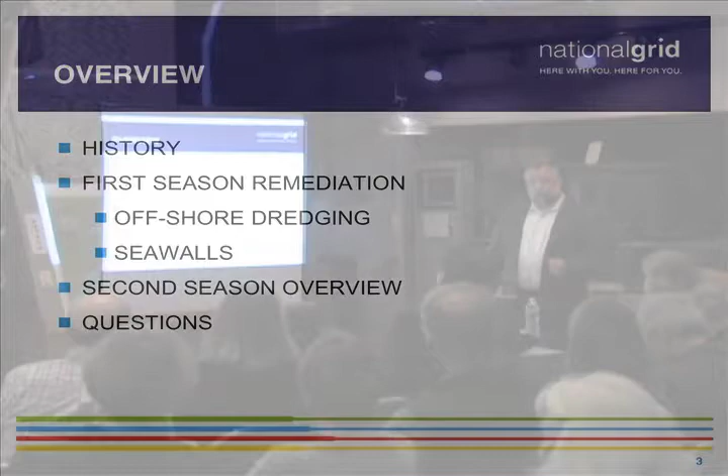So what we're going to be talking about is a brief overview of what we're doing here. First, a little history, and then we're going to get right into some of the major elements that we did this particular season, and then do a brief overview of the second season of work. This is a two-season project. We started in September of 2015, and it's going to end here in May, and then pick back up again in July, and hopefully be done in May of 2017.

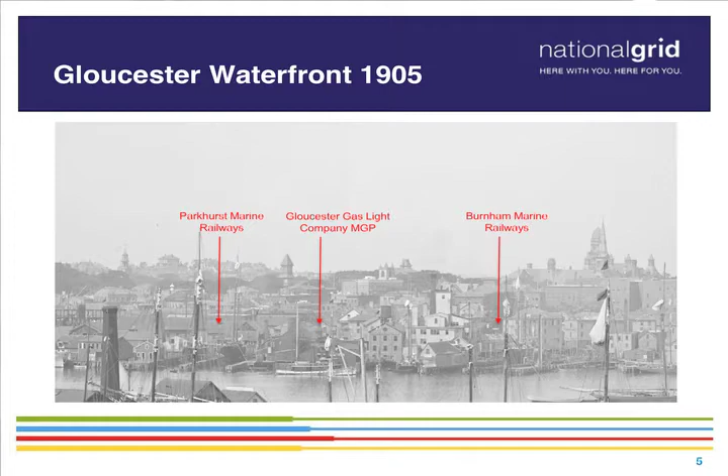So historically, the waterfront was much more crowded. It actually has an industrial past in this area. We had marine railways on either side. Of course, the existing railway here at Maritime Gloucester is still here. And then the MGP, a manufactured gas plant that produced gas for the city from the 1850s or so to about the 1950s, was located at what's currently Solomon Jacobs Park and on the National Grid property. This is a legacy company of National Grid. Through various mergers over the years, it became part of our responsibility.

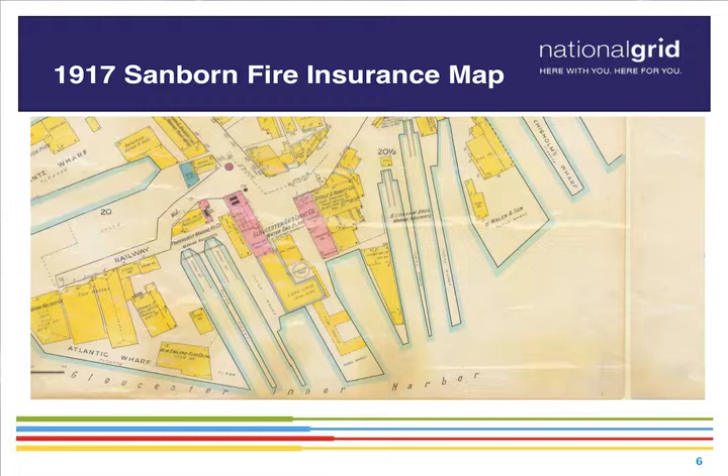So we've been working out here for a long period of time, as Tom indicated, about 11 years. Originally we were doing the investigation phase. We spent a long time. It was a very extensive investigation. During that investigation we did hundreds of sampling locations, both in the upland and in the water. Hundreds of samples were collected and analyzed to come up with this plan that we're implementing right now.

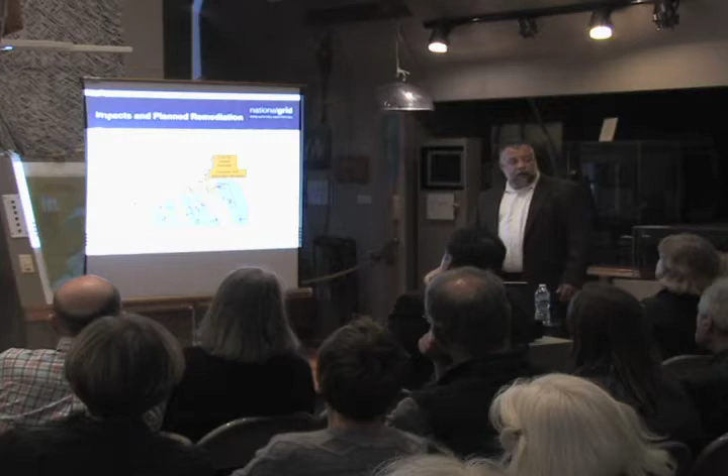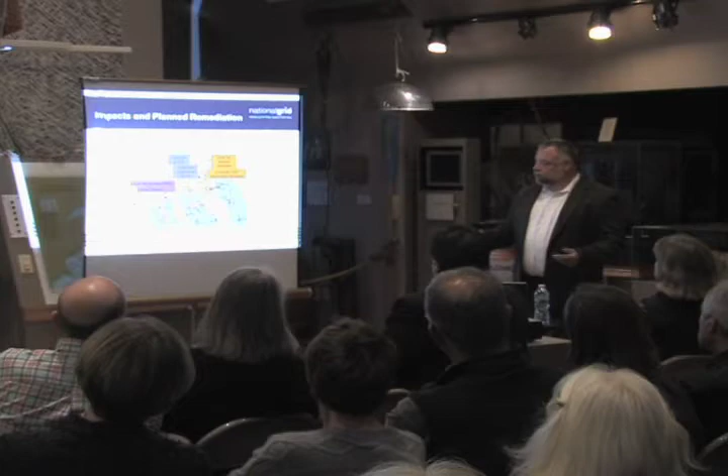That plan consisted of removing soil behind the existing seawalls on the park and on National Grid's property, removing soil from out of the park and then putting in a multi-layer cap. We have coal tar, a byproduct of the manufacturing process. Basically when the coal was superheated to drive off the gas, one of the byproducts of the residuals is coal tar. Coal tar was a product that they tried to sell. They used it in roofing and asphalt, roadways, and in certain commercial products. Up until recently, it was a component of Denorex, used for treatment of psoriasis.

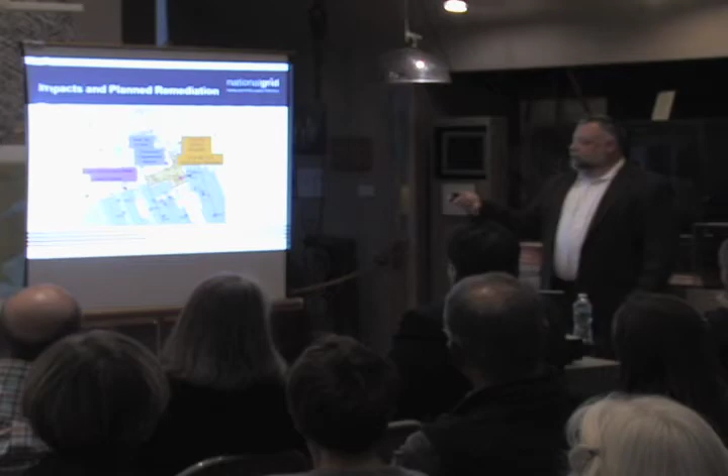But we have coal tar at depth here, about 60 feet down or so, where the interface of the till and the bedrock is located. So we're going to be putting in monitoring wells and recovery wells as part of this remediation, and that product will be removed over the next few years after we get this system in place. And of course, we are removing sediments that have been impacted by the coal tar.

Approximately 7 acres is within the dredge area. And then after we're finishing dredging, we're going to be putting in a subaqueous cap over the sediments to make sure that there's no further migration of compounds into the waterway.

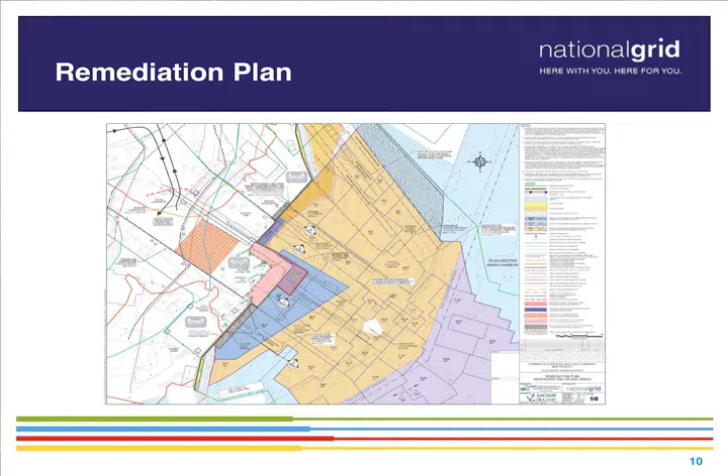So the two primary things I want to talk about tonight is the offshore dredging, which was actually completed this year, primarily completed, which is the offshore being anything past the harbor line into the navigational channel. So dredging, I'm sure you'll see it. I think it's actually still out in the harbor. So this is the dredging equipment that was used. The dredging work was actually performed from a subcontractor to Charter, Riverside and Pickering, out of New Hampshire.

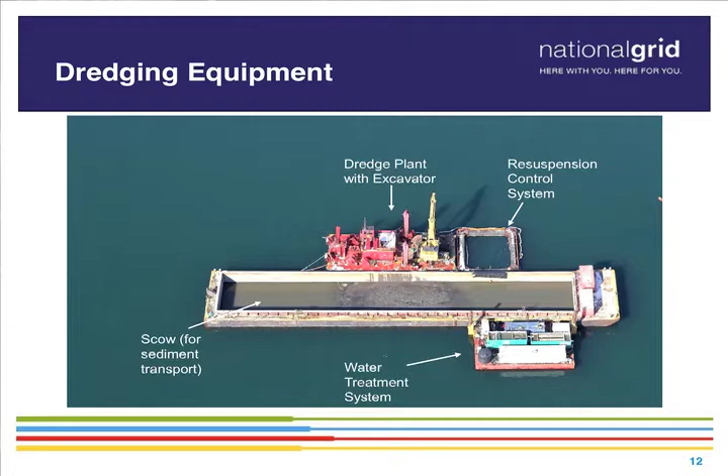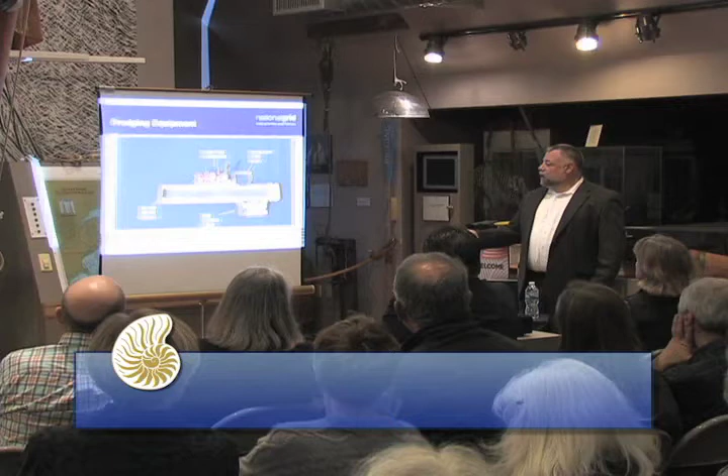And so the various components that make up this platform. So we have the dredge plant. Basically, it's a barge with a control house, an excavator, in this case, it could be used as a crane. And then we have a resuspension control system here. This is basically a turbidity curtain that surrounds the area where the dredging is occurring to keep any sediment that is suspended into the water controlled into that one little area. And then the scow, where the sediment is deposited for then transport off-site, and our water treatment system. So I'll talk about each individual piece.

So the turbidity control system. So this is a rigid frame. So it's a turbidity curtain around the edges. It actually goes all the way down to the bottom, or just slightly off the bottom. You don't want to actually touch on the bottom because it actually disturbs the sediment even more. So it's a little bit raised off the bottom. And then we have a 9-foot tidal swing here in the harbor.

So as the tide comes in and out, this is actually raised and lowered by these reefing lines so that it always is so many feet off the bottom to make sure we control the turbidity that is occurring during the dredging operation. And of course, with the tidal swing back and forth, there's a lot of velocity, tidal currents. So it actually is anchored to make sure it doesn't get blown into where the dredge bucket is actually going down through the water column.

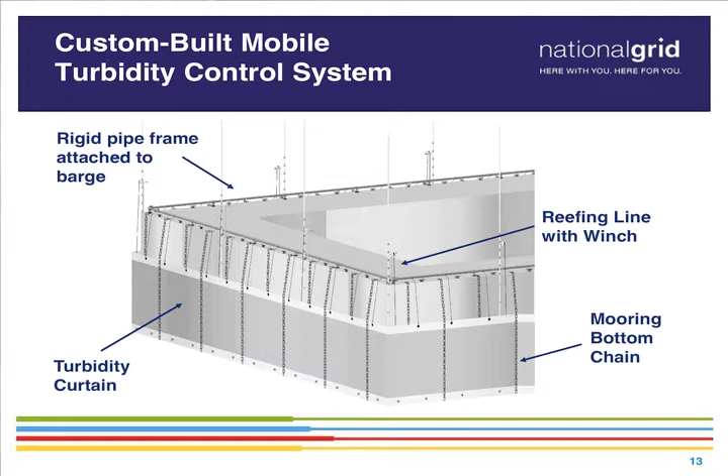So this was actually manufactured on site. It was put together here, specifically designed for this project. This is a view of it before it was actually deployed. And then it being deployed into the water. So there's a walkway here to allow the laborers to come around and move along and move those winching reefing lines as necessary.

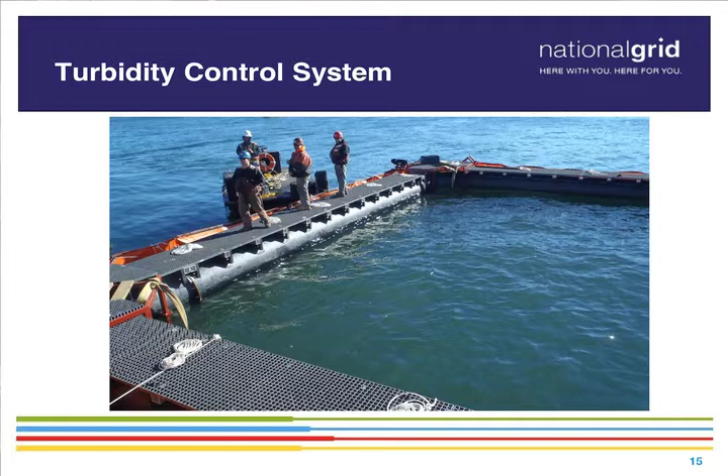So the dredge plant is a large excavator. We're looking at about, I think, 28 feet of water depth here. So this boom is actually capable of reaching to 35 feet with the bucket on it. We have a 1 to 3 foot dredge cut in the harbor. We're moving about 1 to 3 feet in each one of those units of sediment that was being removed. So this was actually capable of making sure that we reached all of our dredge depths.

And this is the control house, as I indicated. Inside is a unit that basically controls the operation of the barge itself. And then the barge itself is anchored with spuds. These things, metal tubes, are actually lowered into the sediment to hold the plant in place so that we can focus on one specific area at a time. And this back spud is actually a walking spud. So this is actually capable of moving slightly side to side, so that if we have to make adjustments, they can do so without actually moving the whole system.

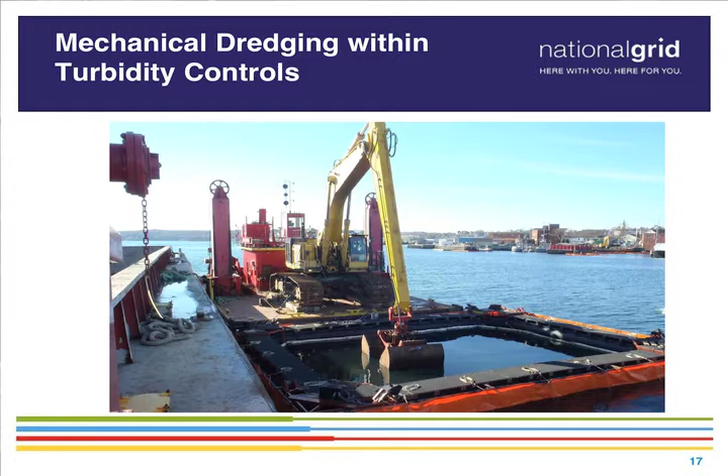So this is a shot of actually the dredge in place, everything in place. So this bucket is an environmental bucket, and I'll get to it in a second. It's a little bit different than your standard mechanical dredging operation. So we have a sensor actually on the bucket, and this cord is actually going back into the cab of the operator. So they have controls in the cab to allow them to position the bucket wherever they need to.

So the environmental bucket is a specially designed bucket for environmental work. It's designed to make sure that the sediment is kept within the bucket. It does allow some of the water that actually is generated when we take a scoop to come out, which is why we have this splash pad here. So the splash pad is, as the bucket is coming out of the water and moved over into the scow to dump this load, there is some little spillage of water. So the water is then sent back into the dredge area or into the scow.

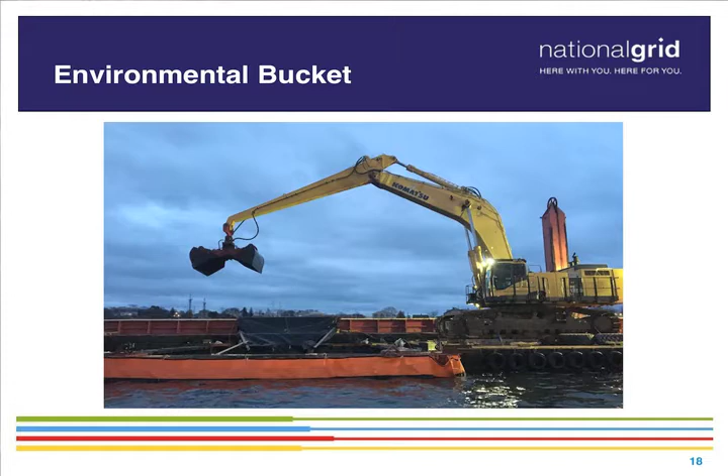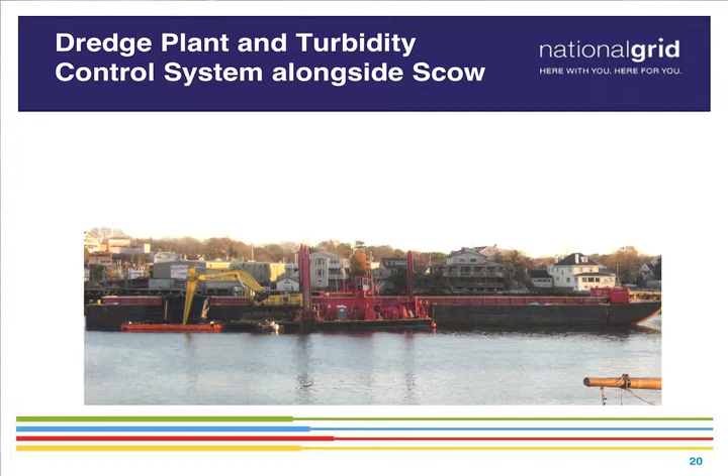So again, a picture of the entire system. I don't know if you've seen the plants still out here, but this whole system is roughly the size of a football field. So this is about a 250-foot long scow, and with the dredge plant here, the scow, and the water treatment on the other side, it's about 150 feet wide.

The scow itself can hold about 2,200 to 2,500 cubic yards of material, which is about a week's worth of production that we were doing. So approximately every week, we would load up a scow and have another one come in.

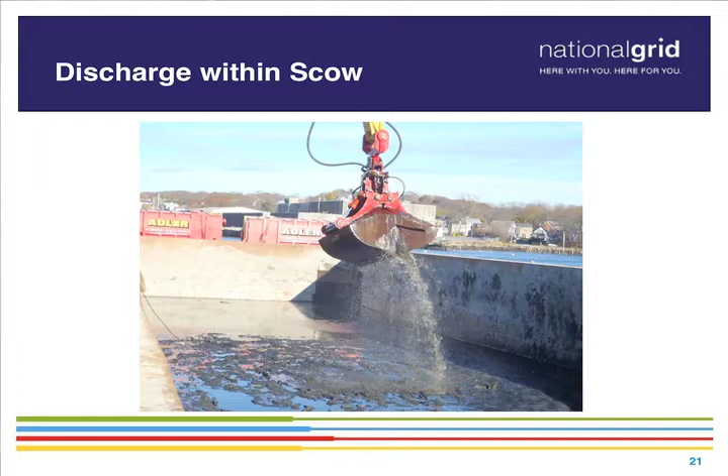Once the material is placed in the scow, we then pump off the water into our treatment system. So this treatment system was actually created specifically for this project. It was put together off-site and then floated here. But it's actually a modular system. So these floats are called flexi floats. It's almost like a Lego system. They snap them together so that you can make these as big as you need to in order to accommodate the size of the treatment system that you want to put on it.

And the treatment system itself is multi-component. So we have product recovery. So if we generate any product during the operation, it then gets collected. It then goes through various treatment, including removal of solids, and then a filtration step. It then goes through carbon for adsorption of any organic compounds in the water, and then it also goes through a metal treatment step before eventually being discharged back into the harbor.

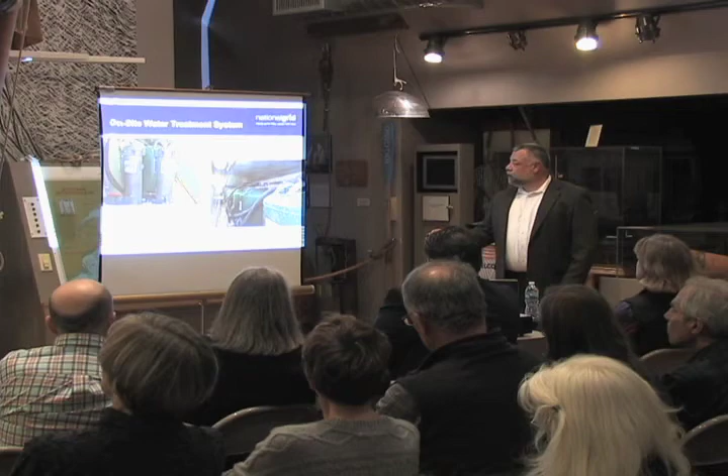So this is a picture of inside one of the trailer units that's on the floats. These are what are called bag filters. They're actually our particulate removal system. And then these are canisters holding the carbon and the metal treatment.

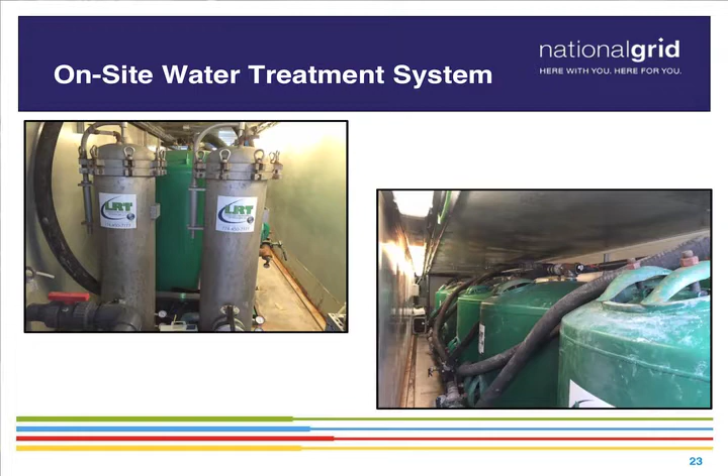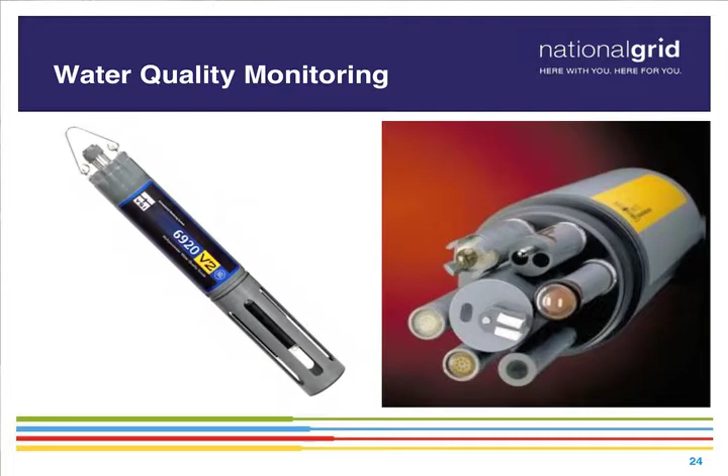So during the operation, we're also required to monitor the water to make sure that we're doing things in accordance with our permits, and also to make sure that we're not causing additional problems. So we use water monitoring equipment, measuring primarily turbidity, and we did not have any exceedances of our permit during the offshore dredging operation.

It actually is an alternative approach that the contractor came up with during the bidding process, and is one of the reasons why Charter, not to mention they're a great contractor, won the job. So originally we were supposed to send the material to our substation, which is on 109 Rogers Street,

with very limited space there, which also limited the amount of production that we were looking to do. So by doing this alternative, we were able to speed up the process. It was a little bit more costly to send it to New Jersey, but overall it was more cost effective, and also it lessened the impacts to the community.

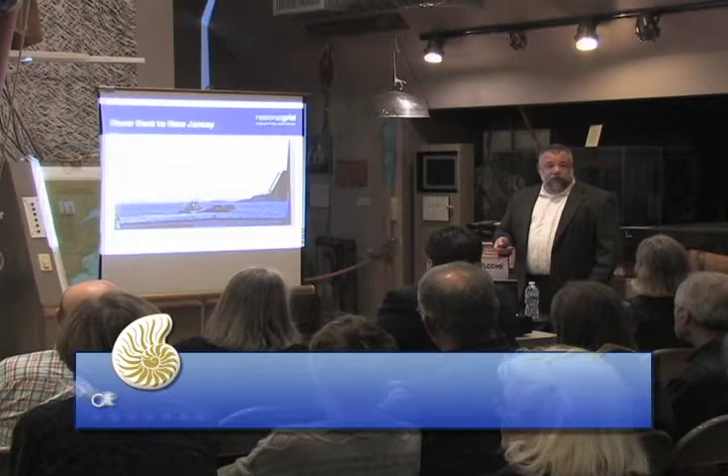So once it goes to New Jersey, the sediment is processed. We remove the water. It then gets sent to a thermal treatment facility where the organics are removed by heat, basically burnt off. And then finally it goes to another landfill in Pennsylvania to be used as daily cover. Daily cover: every day they cover the trash in the landfill.

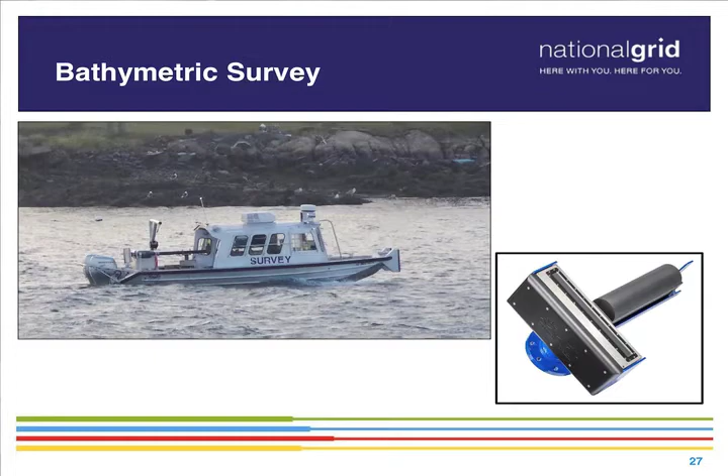So the question then is, how do you know you got everything, right? So on a regular basis, we're doing our survey of the bottom. We actually have a survey boat on site. It's a hydrographic survey. Basically, we have a sensor on the bottom. This is taking a picture of the bottom. That tells you if we met our design depths and makes sure that we removed everything that needed to be done.

We've finished the offshore dredging portion of this project. Using the survey, we identified a couple of isolated high spots that still need to be removed, but we were past our window of opportunity to do that work per our permits. We have a restriction not to do any silt-producing work after February 15th. So those high spots will be addressed next season. So that's the offshore dredging.

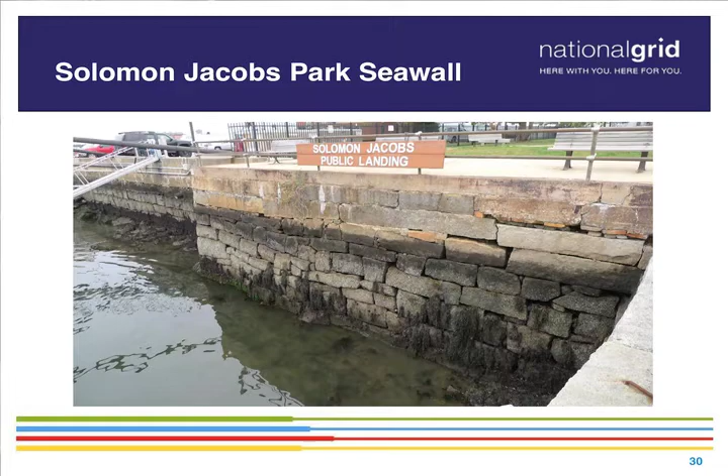I'll talk a little bit about the park seawall work. So this is the Solomon Jacobs Park wall. As I said, this is a historical seawall. It actually dates back to the plant itself, circa 1890 or so. So it's greater than 100 years old and was ending its useful life. As you can see here, there's a slight bow in the wall. This is actually a failure. The soil is starting to move, and these stones are sliding out to the harbor.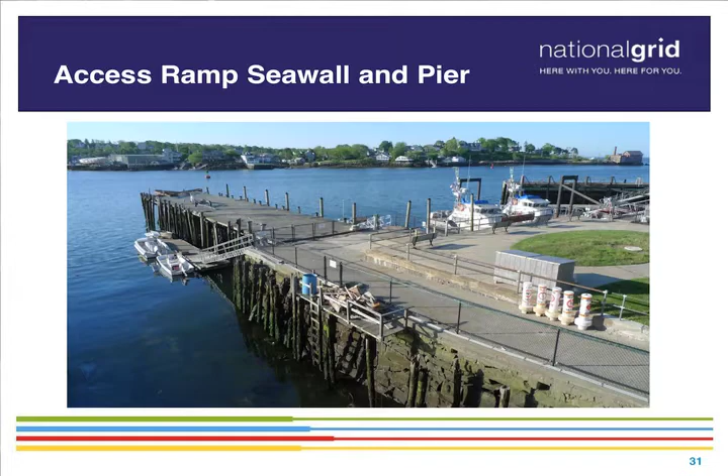And on the National Grid side, it was even a little bit more pronounced. We actually had some sediment issues in the platform. If anyone walked out here, you probably saw some patches over here. It's actually soil being lost through the seawall. But this seawall is historic in nature. It required additional permits. We are working with marine archaeologists and other professionals to make sure that we're putting back the new seawall in similar aesthetics as the original wall.

So at the end of the day, hopefully we'll have an improved seawall that will last another 100 years. And also with the improvements of the seawall itself, we have removed National Grid's pier, which was in a state of disrepair itself and needed to be replaced. The city is going to be taking over our property as a lease and installing a new floating dock system. So hopefully we'll have a very improved, more functioning waterfront when we're done.

So how do we do this, right? We need to remove this soil. It's about 2,000 cubic yards of soil behind the wall. It's not like we can just go in and remove it. We have buildings behind it. We've got the Coast Guard operations over here. So the first step is making sure that this material stays in place. We did that with a support of excavation wall.

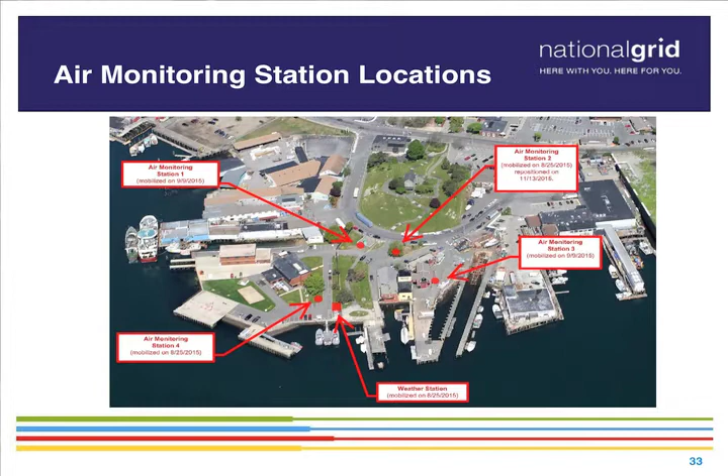One being air monitoring. So we have air monitoring stations, and if you've been around the Maritime Gloucester property, there's actually one right beneath us, I believe over in this corner. And we have a couple out near the park, and then one on the Coast Guard. So these are monitoring the air 24/7, 7 days a week, 365 days a year. They're online at all times. They consist of multiple detectors. They are used to test for dust, and then also for organics in the air.

So this is actually fed back to a computer on the site, and then if we're off-site at the time, we are actually linked in through mobile phone, so if there's any kind of alerts from the system, the off-site project people can actually get the alert and then relay to the people back at the site, or come to the site to see what's going on.

We are also monitoring stability. So we're making sure that the actual infrastructure that stays in place, this is the U.S. Coast Guard seawall, doesn't move during our work. So these are actually sensors that, again, are fed back to a computer, and these monitor if there's any minute movement in the seawall itself. So we know well before if there's an issue of this thing having some kind of stability problem.

And of course, during the work, we want to make sure that we contain any suspended solids. So we actually have another turbidity curtain around the work area. It's a very similar situation as with the marine dredging, and very similar concept, except that it's a long linear length of boom that surrounds the entire work area instead of a very isolated area.

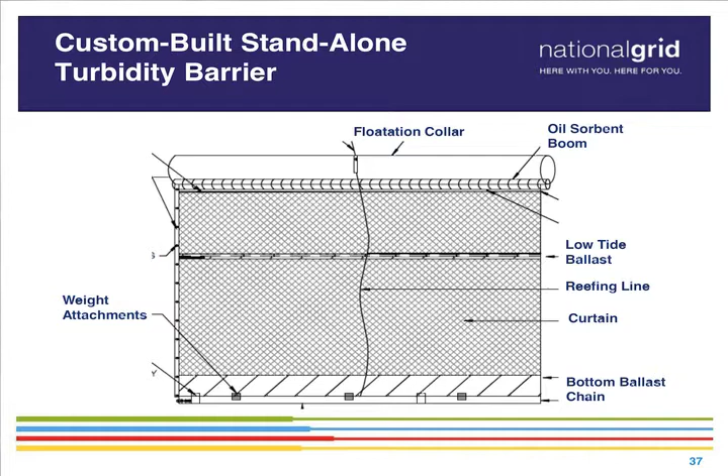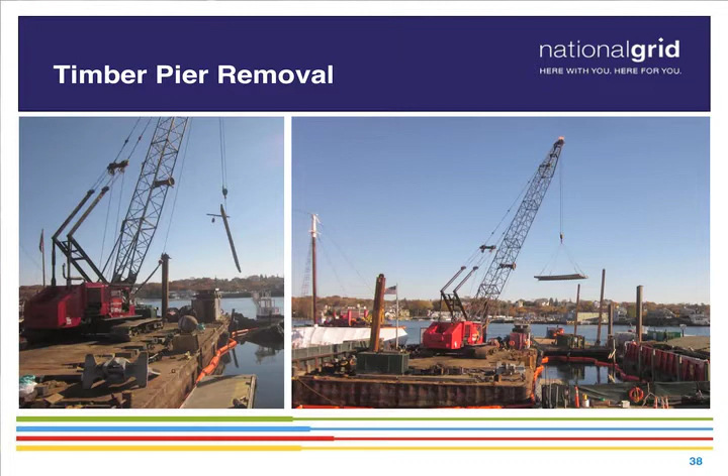So the first step, as I said, was the removal of the timber pier. With a barge-mounted crane, we're able to cut the pier up into sections and place it into a container for delivery to another location off-site. Now we have very limited space here at the site. You see it's a very congested site, a lot of equipment, and so we weren't able to move this material onto this land and ship it off this way. So this material was actually shipped to Quincy to a contractor yard, where it was then picked up out of the water and put onto trucks, and then it was shipped off to another landfill.

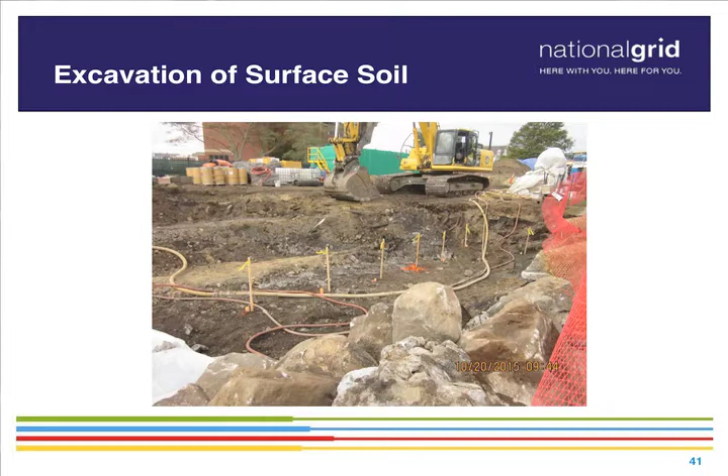So the first step is actually getting our equipment down to the proper elevation. So this is the removal of the surface soils, so we can get our drill rig in to drill the piles. This is actually a layout of where the piles will go. You can see the spacing here, very tight spacing. And then the actual drill rig itself, putting the piles in.

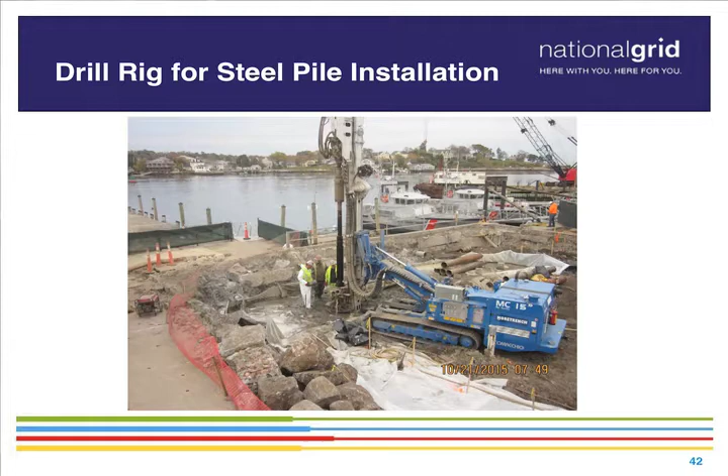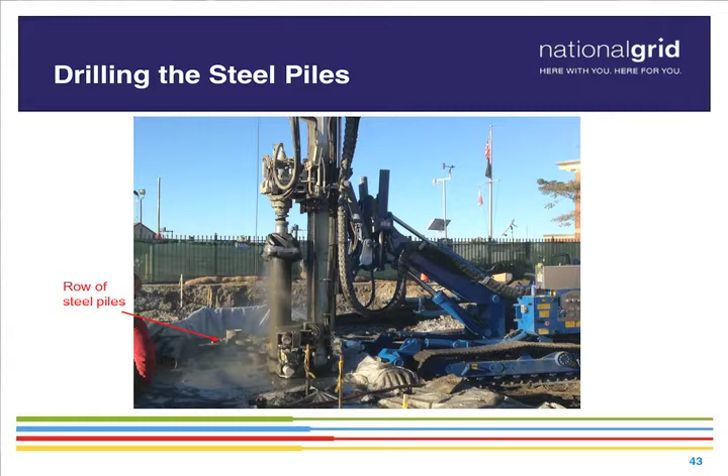The park elevation was roughly around 10. So we removed a few feet of soil in order to get the drill rig in here. And you can see we've already made some advancement here with the row of piles in place, working on the progress. And then this is the row in place as we start to remove some of the soil in front of it.

So obviously we're working with the tides. We know that there were difficult subsurface conditions here. Through all our investigative work, we've actually encountered sizable boulders. I believe the largest that we encountered was about 14 feet in diameter. To give you an idea, it's somewhere very close to this, from the floor almost up to the ceiling in size. So it's large boulders underneath us.

So we didn't encounter the 14-footers, but we did encounter a few sizable pieces that had to be broken up. So we know that we had a lot of work to do within the time allotted to us. Obviously, we had to stop. We had to get the foundation of the new wall in place prior to February 15th, the same window of opportunity that we had with the dredging.

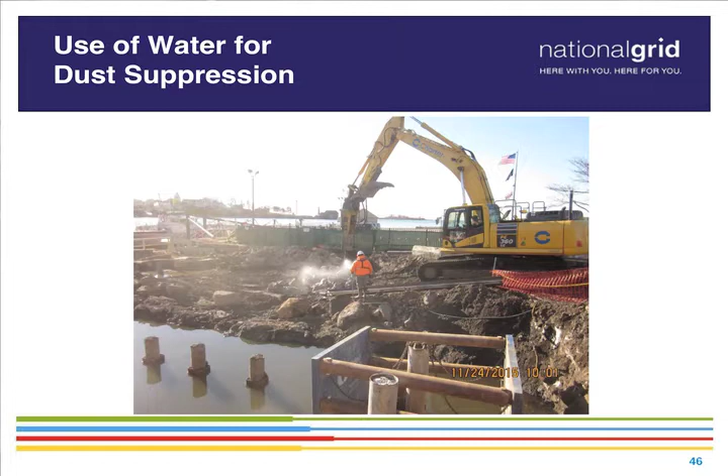where this material was going. So as part of that, we make sure we control our dust being generated as we bust this up. This is a hydraulic hammer, breaking up rocks into about 6-inch or smaller sized pieces. And we use water to suppress the dust during the work.

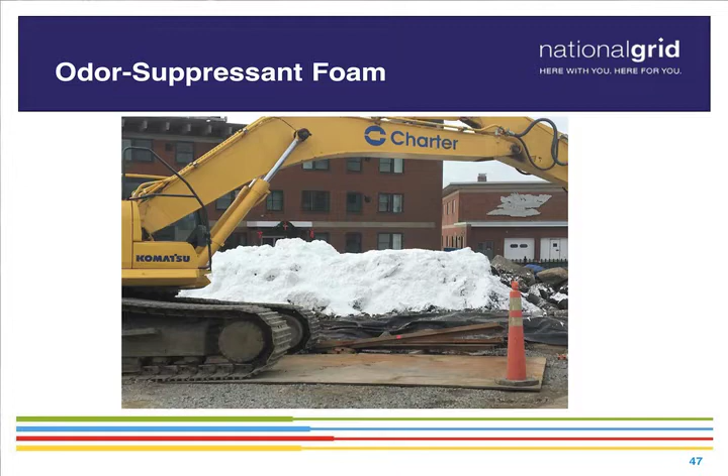And then obviously the coal tar impacted soil has an odor to it. This is odor-suppressant foam, which we use to knock down the odor. This odor-suppressant foam is used during the work so that as we generate more and more soil, it goes into the stockpile area and then is covered with foam. The foam acts almost like a barrier over the soil to keep any odors in place. And then at the end of the day, we actually use tarps to further control the odors when we leave the site.

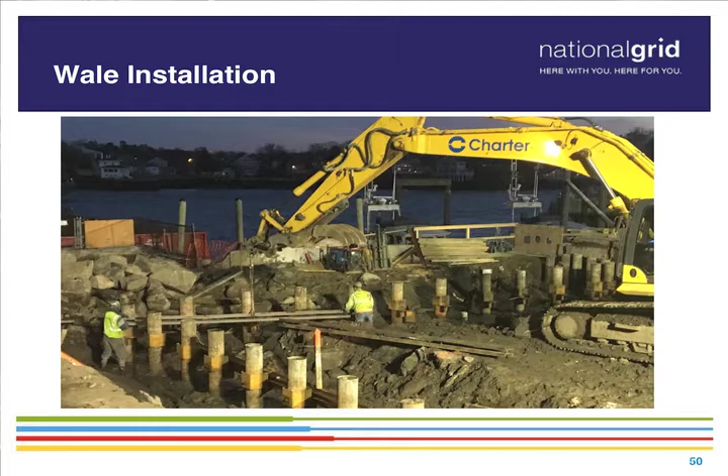So this is a picture of the mini piles, the steel piles in place. What is being welded is the bracket onto the piles, and the bracket will be used to hold the wale. As I said, we were working at various times to work around the tides. As you saw in an earlier picture, this area is actually in the intertidal zone right now. So we're working at night around the tide to make sure that we can get this steel member in.

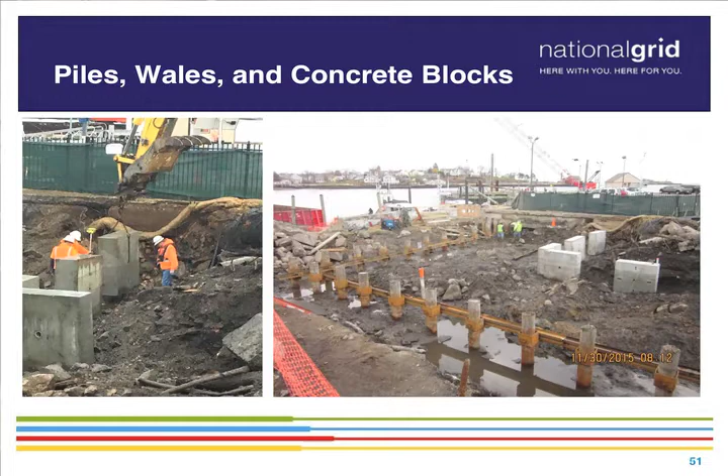So these are the concrete blocks that were put back into the park. These basically are the anchors for the system. They're also called dead men. And then we use the tie rod to connect the mini piles wale system to the dead men. And then we use structural fill to backfill the area for additional support.

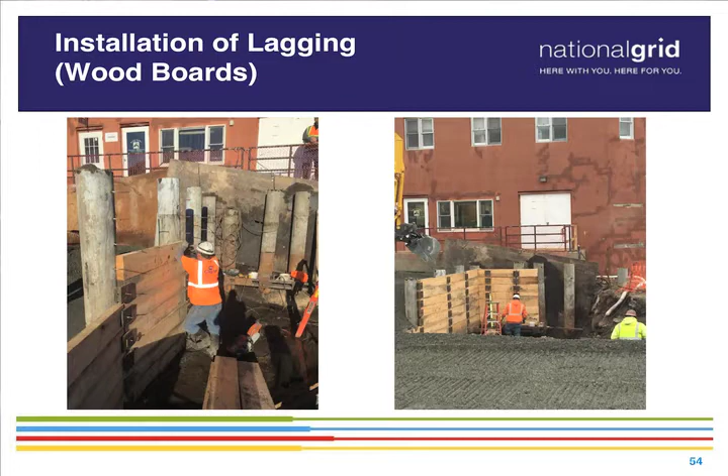So you can see the spacing between the piles. So one of the ways we control the soil from emanating from the land into the water through the piles is we put in lagging. This is done sequentially. So we put down a few boards, we excavate, put down a few more boards, excavate, and so on and so forth, until we're about 12 feet below the original ground surface of the park.

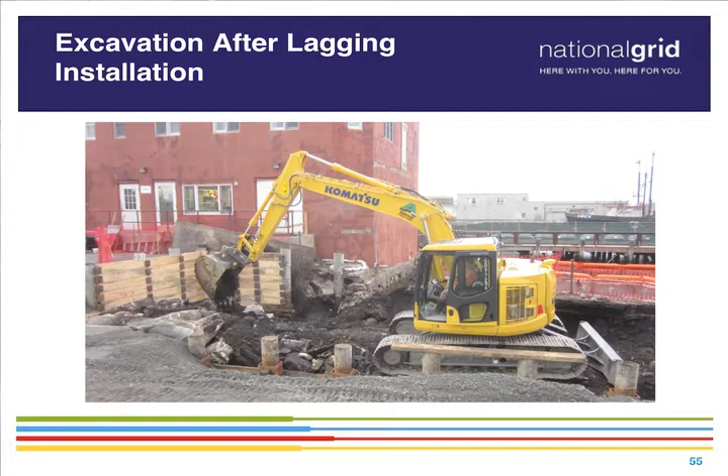So this is just showing the excavation. Obviously, it's an iterative approach, as I indicated, where we're excavating and then putting lagging on. So this is, again, on the outbound tide, removing the soil in front of the support of excavation wall. And we're also removing the stones and the soil at the same time. And this is how it looks with all the lagging in place.

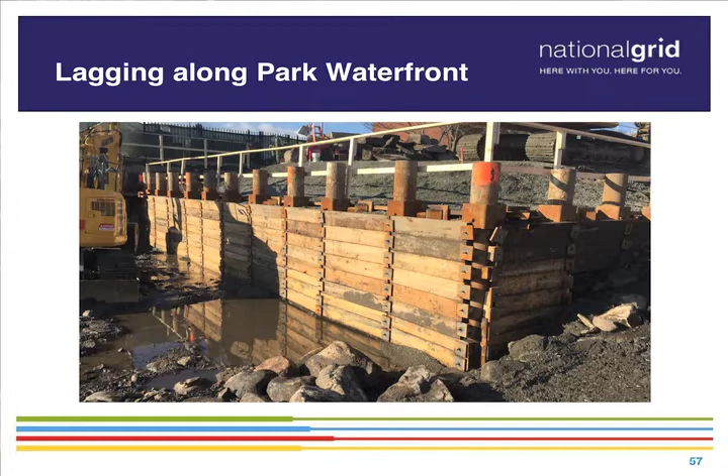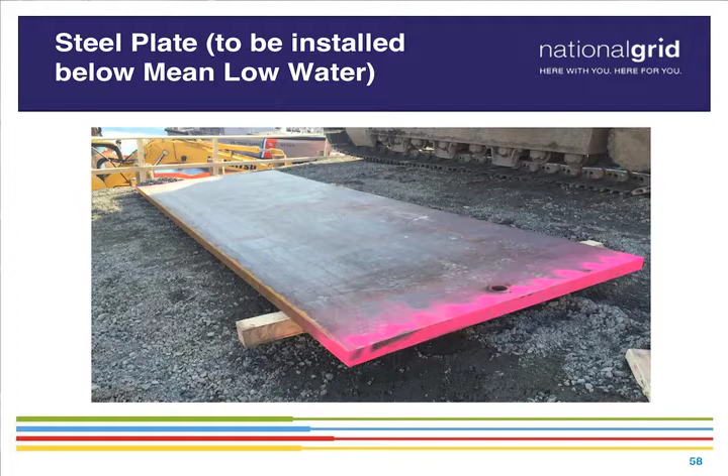And then once we get down to a point when we can't put the lagging in from the surface, we went to a steel plate as a means of holding back the soil instead of the wood lagging. The steel plates were put into place through guides, and as we advanced the excavation, the plates would then push down farther, and then excavate a little more, push down a little farther.

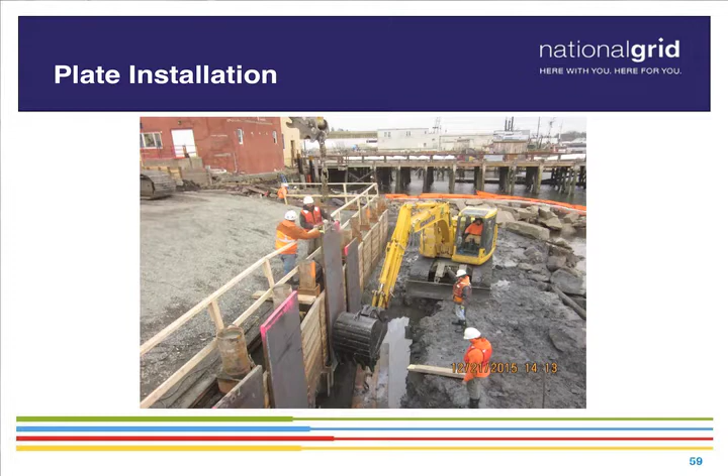So obviously, when we're doing this, we encountered more rocks, and in order to get through that, we were using barge-mounted equipment to hammer out those rocks as we encountered them, so we can advance the steel plates. And when we're all done and we're at the right elevation, we use divers to cut the plates into place. Divers were Black Dog Divers.

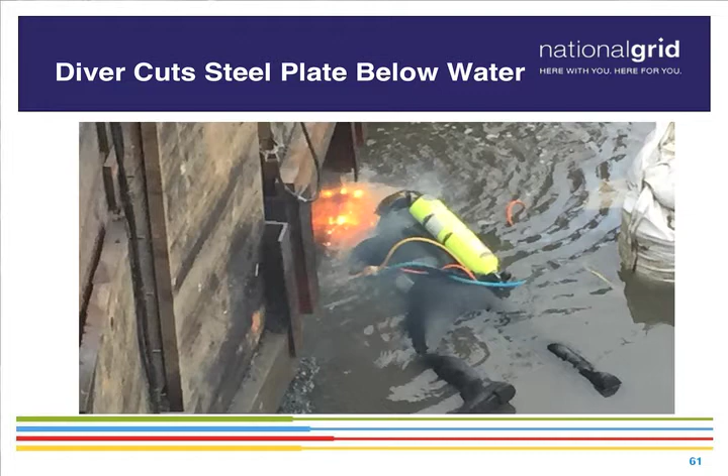So what we did was a backwards, inward-out approach. So we would come down a ramp and start really on the U.S. Coast Guard side, and then work our way out. That way we would actually be continuously removing the soil up and out, and we wouldn't have to traverse the area where we excavated first.

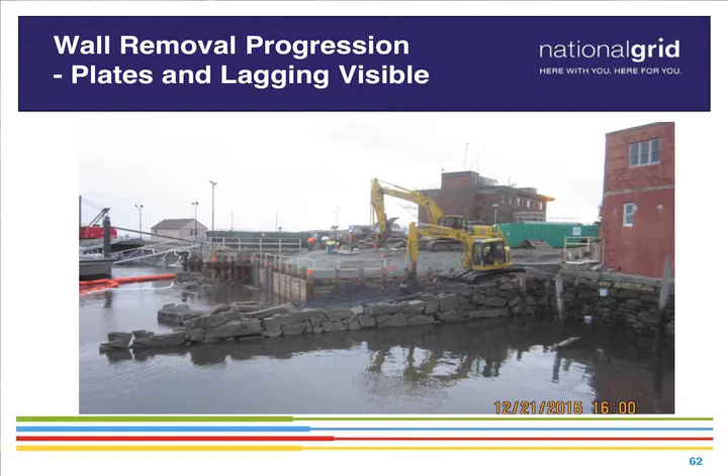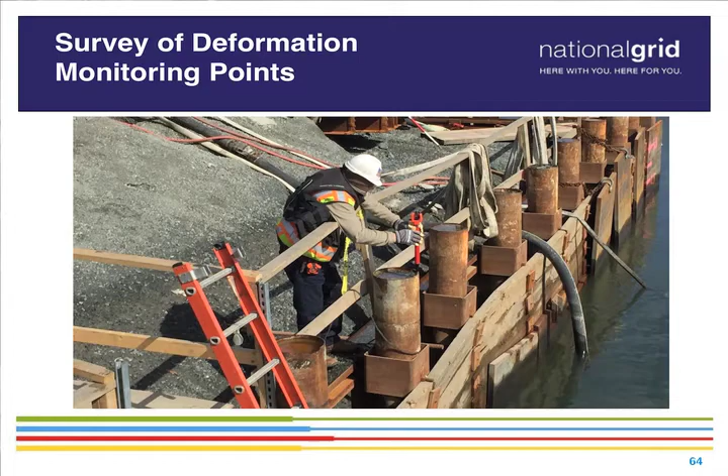So this is a picture of what it would actually look like at high tide. As you can see, the water actually is past the point of the actual support of excavation. And these are our sandbags that we're going to be placing in a minute here to form up the new wall foundation. But before we actually start putting the new wall back in, we have to make sure that we actually have removed everything that needed to be done.

So we are surveying on a daily basis. Not only are we surveying the work area that we're doing to make sure that we've gotten all the soil out, but we're also monitoring, very similar to the sensors we have on the Coast Guard wall and the Maritime Gloucester walls. We're also surveying these points to make sure that this support of excavation wall isn't moving during our work as well. Again, the survey work, surveying the area in question.

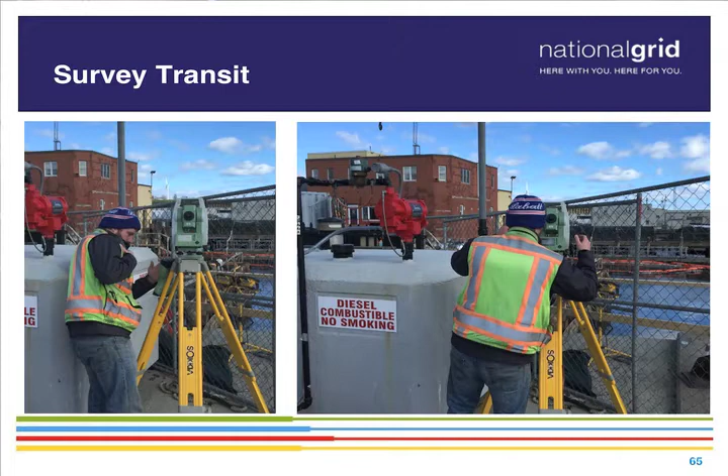And then during this process, we're removing the granite block. So the granite block is actually being reused to the extent we can. We want to make sure that we have the same aesthetics that we had from the original wall. So we're taking care to remove them very slowly, carefully, so we don't mar the stones and have chips or damage to it. So when you actually get the new seawall put into place, it looks very similar to what was there before and also not damaged.

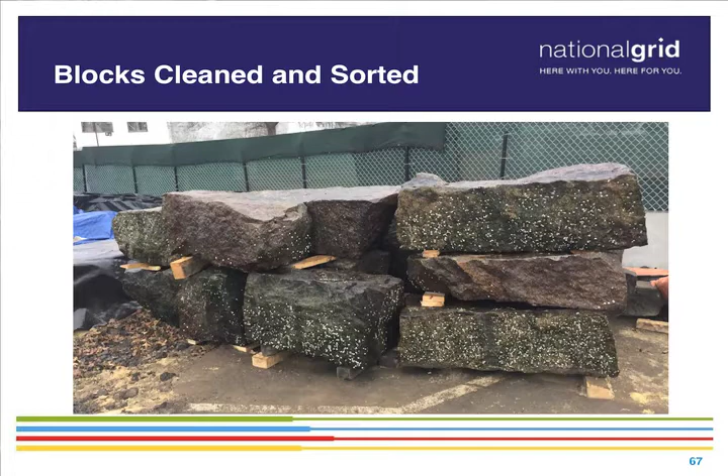So as we're excavating, the blocks are actually steam cleaned and sorted to size so that when we put the wall back together, we know how they can actually go back together in the right form. Obviously some of these stones were actually impacted with coal tar and we couldn't use some of them. We actually had to bust them up and then dispose of them.

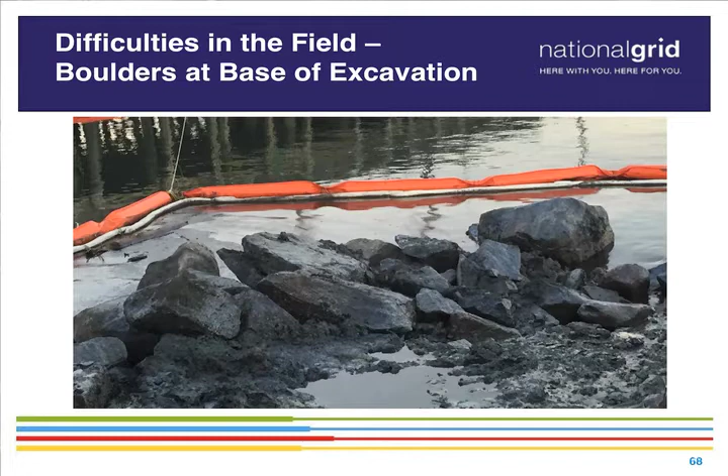So this is actually the base of the old wall. Obviously it's a pile of stone. More than likely it was a natural formation that they supplemented at the time, putting in additional boulders to form the base of the old seawall. Obviously there's a lot of stone here that had to be removed and picked up. It's actually one of the things that caused us the most delays, dealing with the stone, taking it out of the excavation and then busting it all up.

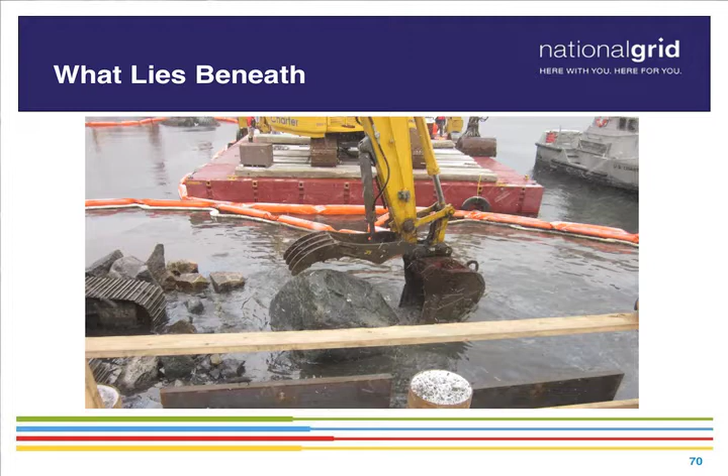The stones that we encountered were actually quite large. Not as big as the 14-foot diameter ones, but this is actually the size of a small car. A couple of boulders. So all this, as it went into the stockpile area, was then broken up after the fact in the stockpile area and then shipped off site.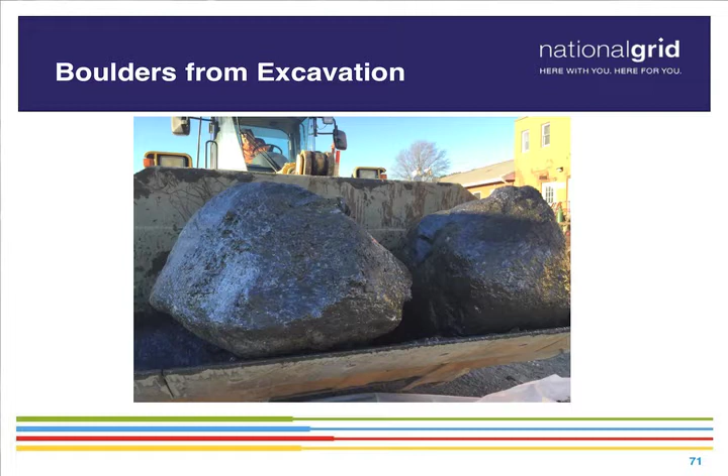So after we removed all the soil, we started rebuilding the seawall. And with any concrete work that we normally do, you have to build a form. Obviously, we're not going to be able to do a wood form. So we used sandbags. These sandbags are about 3.5 foot by 3.5 foot with multiple layers. And they formed the barrier around the concrete that was going to be used as the base.

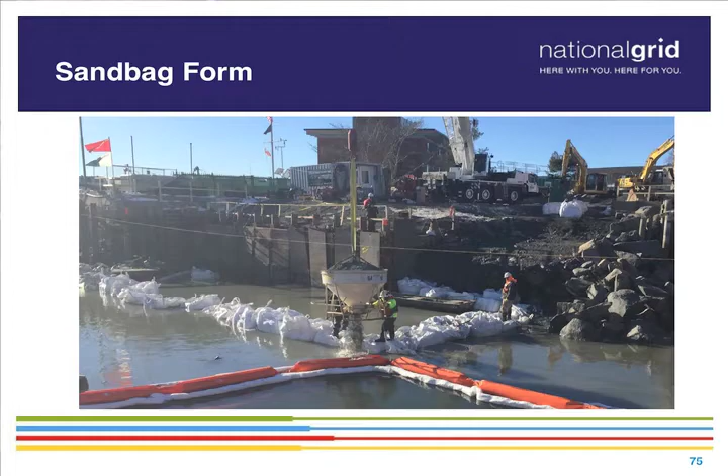So the top of the concrete base for the new seawall is about 15 feet below the former surface of the park. And then the bottom of the concrete base is about 22 feet below the top of the park. So we had to go quite deep.

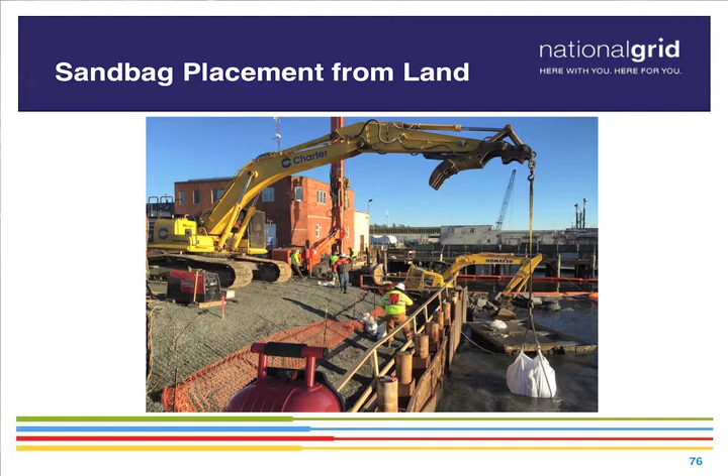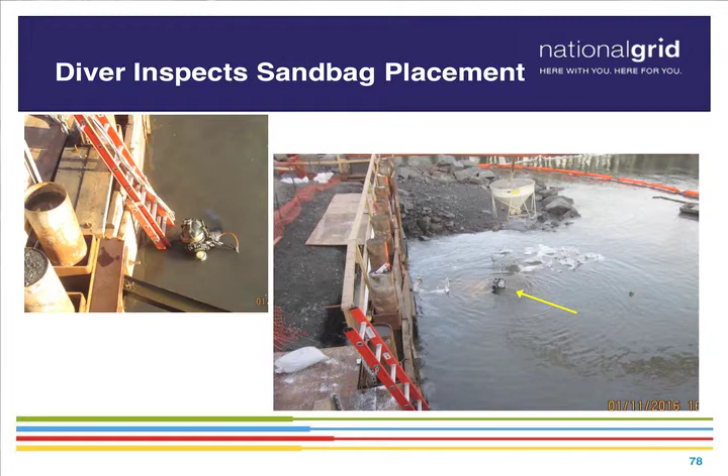So most of that work is actually done by various equipment, by both land and water. This is a sandbag being moved from the land into place, but we also use barge-mounted equipment when necessary. And then we also had divers assisting us to place them in the proper location. And of course, we're working around tides and whatnot, so we're actually, again, continuing to work at night.

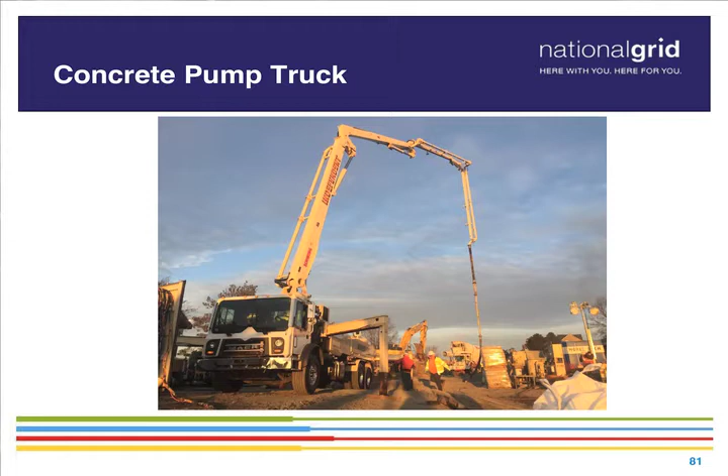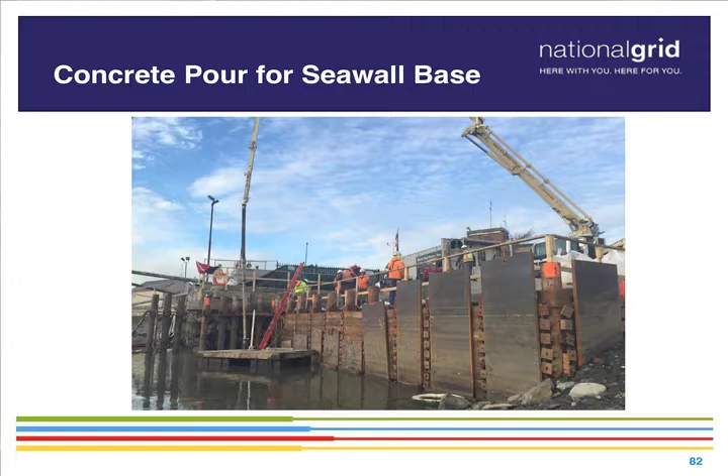So once we get the sandbags in place that actually form the concrete, the concrete was coming in. Obviously, we can't dump a concrete truck right over the side. So the concrete was actually pumped into place with this pump truck. The concrete trucks would come in, empty into a hopper, and then the concrete was pumped over the excavation into the water column and placed when there's enough water to have a diver in the water to assist us putting the concrete in. And then once the concrete is pumped in, we actually survey it to make sure it's at the right elevation.

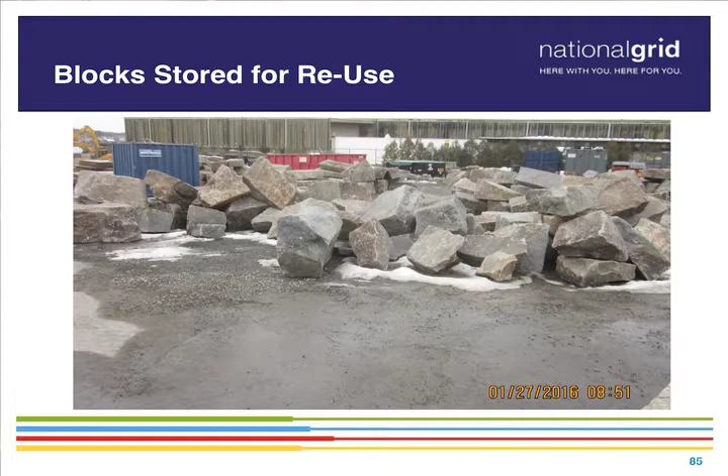So, and then while we're doing this work, they were moving the stones over to our substation where it was actually temporarily stored. And someone, I don't know who actually with the project team, came up with the idea of laying out the stones for the wall to save some time in the substation so that they would have the right orientation when we actually go back to put it back into the water to save some time.

So what you see here is also holes in the stones that were placed in there. These are actually the holes where we're going to put dowels into that would anchor it to the concrete base. So this is actually the first course of wall and the second course that actually have been installed, laid out on the substation. It was then shipped back to the site and offloaded.

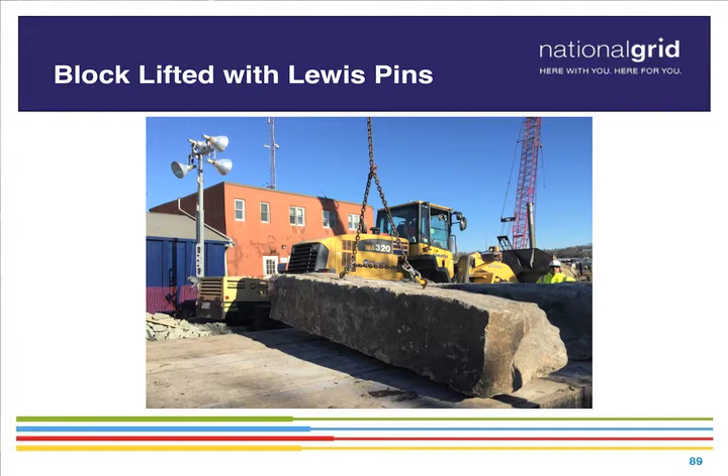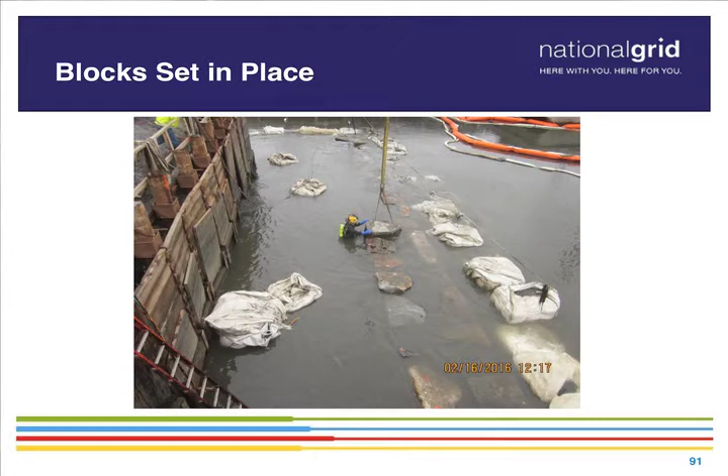So these are what are called Lewis pins. Again, it's a means of picking up the stone without marring the stone to the extent we could. And then they're slowly placed into the water. So this is the stone going back in front of the sandbags. So this is actually showing 2 rows of stone. We have actually got to the point now we have 3 layers in on the front face.

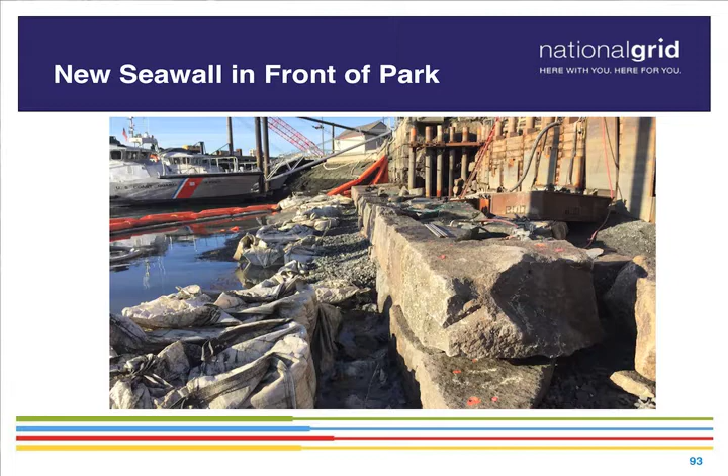But we didn't have pictures of that just yet. It was as we were working, pulling this together. So this is what it would look like. And as it slowly comes up, and that's the seawall work.

So a brief into the second season of work. So as I said, this is a 2-season project. We're nearing completion here. The idea is that we get the seawall done by middle of May, so that the park can then be put back into service during the summer months. And then we have permission from the city to go back into the park to continue our work after Labor Day again.

But the second season of work consists of the dredging in the nearshore area, which is anything within the harbor line, and also getting the isolated high spots that I mentioned on the offshore, and putting in a new seawall in front of the National Grid building. So this seawall was actually a feature that should have been put in season 1. However, the approach that we were using for the foundation for this wall, we started doing it, and we encountered very difficult subsurface conditions in this one particular area, and we actually couldn't physically implement the approach that we indicated. So this is actually moved to second season.

We're coming up with a different approach to install that foundation, and that will then be sent to the regulators to get the proper permission and to get amendments to our permits in order to install this. And then, once we get all the material out, we're putting in what they call a pore water cap here along the shoreline, basically to prevent any further migration of any contaminants through the sediments into the water column.

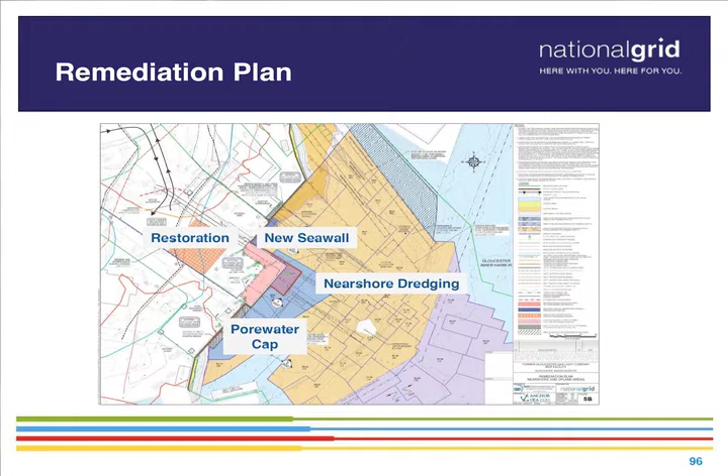And then finally, restoration. So this work will start in July on the Coast Guard property. And then in August, we're shifting over to Maritime Gloucester. And then the whole area will then be under construction in September. And we're hoping that we can get everything done by May of 2017.